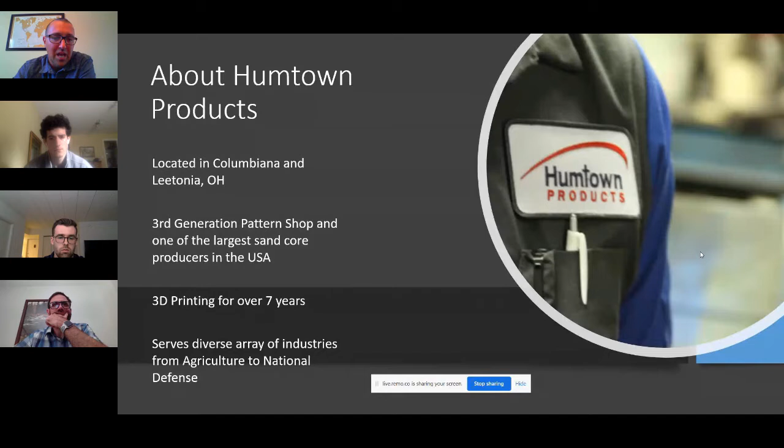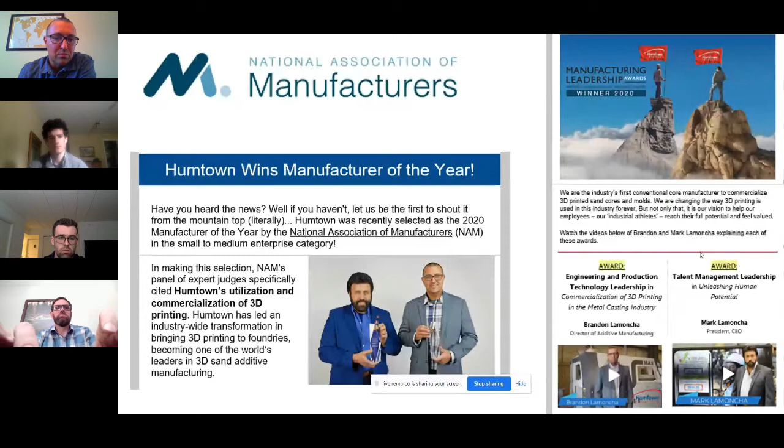So it really goes to show that additive manufacturing is being adopted not only here in the United States, but worldwide. We're shipping product not only to Canada, Mexico, Brazil, but we've air freighted as far as Indonesia. So we're starting to see this as a global trend.

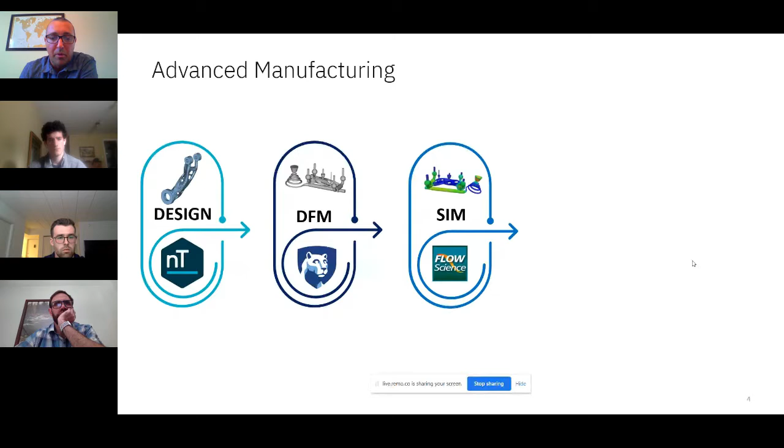But like I said, 3D sand printing isn't really even the focus of this talk today. Today we're talking about advanced manufacturing as a whole and the partners we partnered up with to design a really exotic part that would not typically be thought of using sand casting, and the tools to ensure first-time success. So we'll talk with nTopology with Ryan O'Hara on the design, and then design for manufacturing with Penn State. We're going to touch lightly on the simulation, we used a partner at Flow Science for simulation. We'll talk a little bit about the mold being printed at Humtown, and lastly, it was poured at our partner, Trumbull Foundry and Alloy, locally.

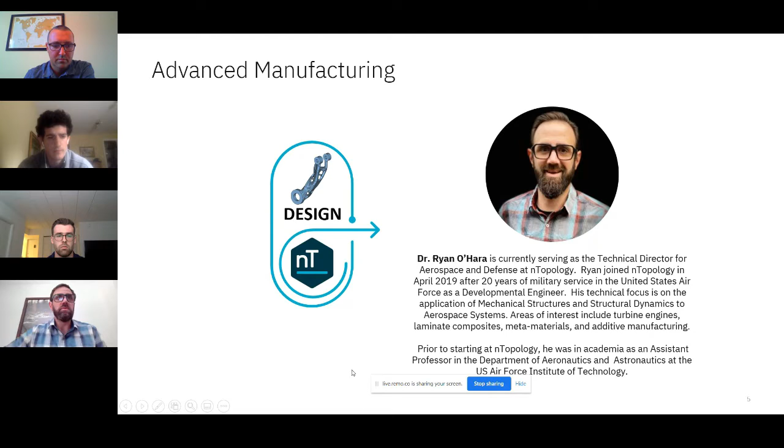So, go to the next slide. Okay, and then actually if we could get the text up there. So what is nTopology? We're really just a computational modeling platform for design, simulation, and when you couple those together you're able to do advanced manufacturing. And the way we handle geometry is we actually use implicit geometry, and that implicit geometry allows us to generate shapes volumetrically, and we're able to do that really quickly.

With that said, we also take a field-driven approach, and we use fields every day when we do design. Oftentimes it's a flow field, or maybe a stress field, or displacement field, and typically the designer will use those fields to influence their design, either to add or remove material. And we can actually do this programmatically in our software. And then finally, once you're able to generate a design, we actually allow you to store and keep that workflow so that you can reuse it down the line.

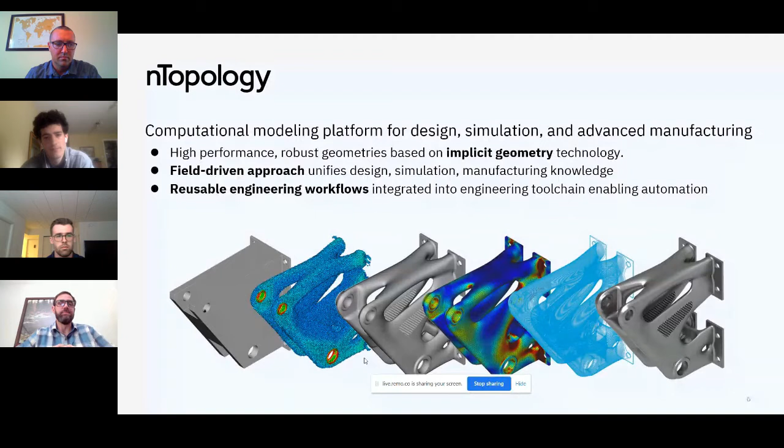So, we'll go to the next one. Okay. So with that said, I was reaching out to partners to work on a collaborative project, and one of those things that we've done here is -- you'll have to forgive me, my children may have forgotten that we're doing a webinar here, so we may hear some noise in the background.

With that said, one of the big things is that in manufacturing, you might have common platforms like a robotic arm, especially when we talk about efficiencies in the workplace, and making things repeatable in that sense as well, and bringing automation in. So one of those things that we wanted to do, for an example, is use a robot arm in this case, where this part is produced via casting.

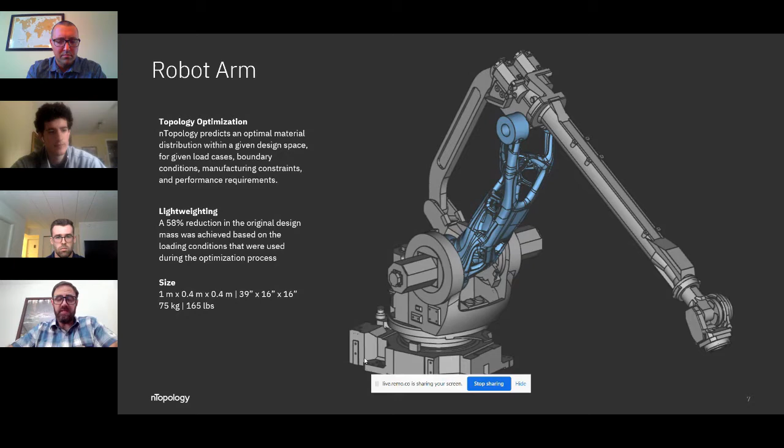And we thought, hey, using our software via nTopology, could we actually use a topology optimization method to actually lightweight that part even further? And for us at nTopology, this was a big deal because this robot arm was over 1 meter in length and about 400 millimeters in diameter.

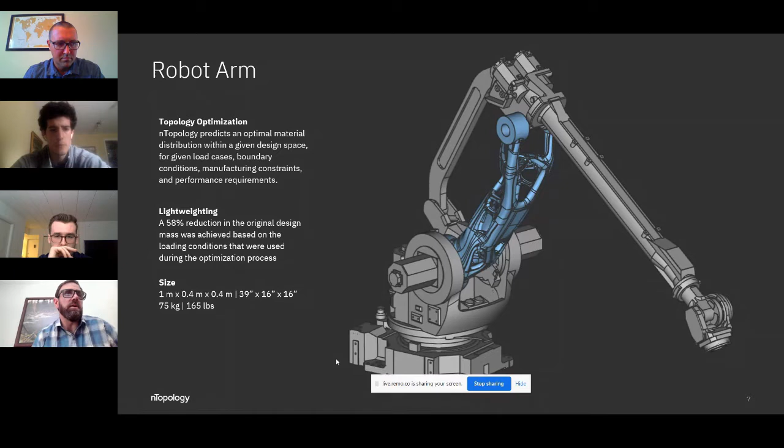Although additive manufacturing is great, it's not really the best way to produce large geometry, and we need to go to more traditional processes like sand casting. And that's kind of where Humtown and Penn State came in. So the motivation here is to produce this optimized part with a 58% mass reduction.

In terms of advanced manufacturing, going back to this multi-step process of producing an optimal part: casting, so design and simulation is one piece of this, and then the casting and the final machining are the other parts to this.

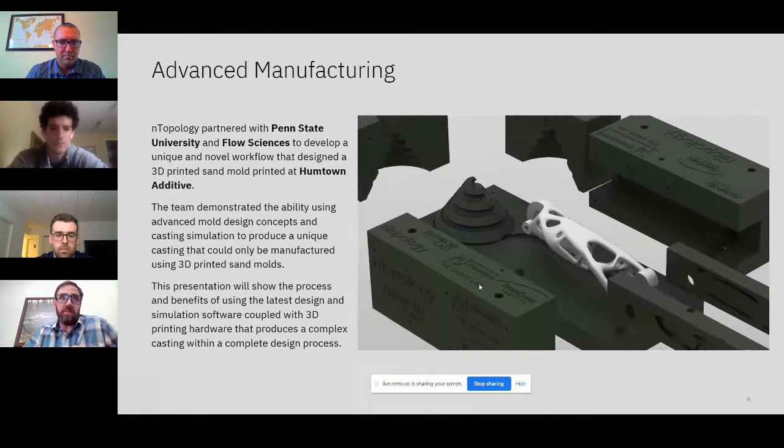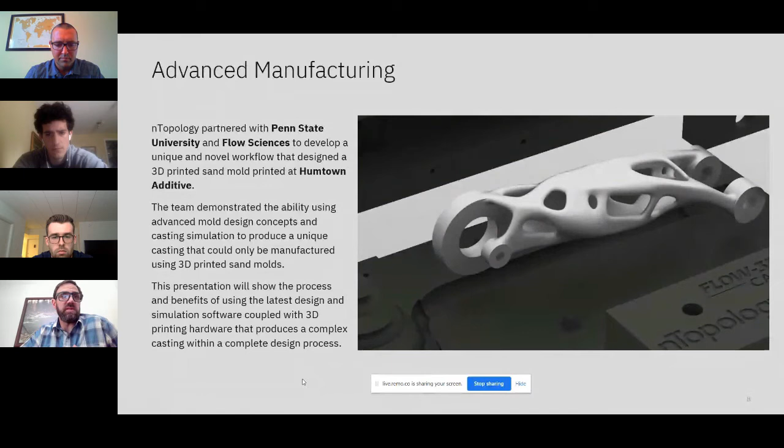We needed to partner with Humtown and Penn State, and we also included Flow Science to do some casting predictions to help produce an optimal part, especially when you consider the size of this part. When we initially planned this, the size added a fair bit of cost in terms of the mold, so we needed to make sure we got this right the first time. That's where we brought in Penn State and Flow to help out with the core and mold design.

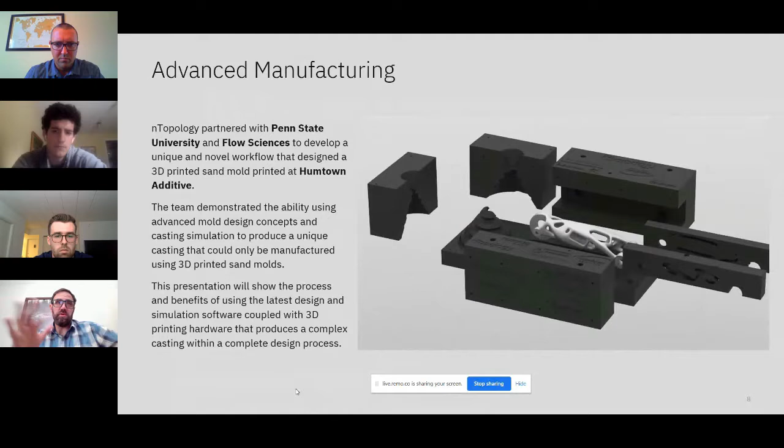As you can see in the image, this is kind of the multi-piece part that is able to produce a lot of complexity here. We'll be talking about some of the other features in terms of advancements in casting and mold design.

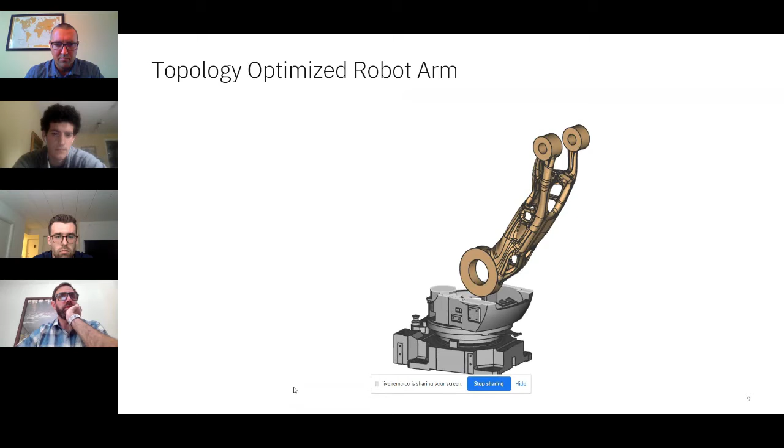In terms of topology optimization, what does that really mean? The key here is that we use a common method called the solid isotropic material with penalization method. No one ever really says that - they just say it's top-op, or I use top-op with SIMP.

The idea is that this SIMP method gives you a material distribution based on density, and then we use that density to basically put material where it needs to go. We often call this a load path visualization. Engineers will apply loads and look at the stress, looking at colors in areas of high stress and areas of low stress, removing material in areas of low stress.

We're basically doing that in this scenario, optimizing this part for stiffness while minimizing weight. So that's the key here - we have a really stiff part with minimal mass.

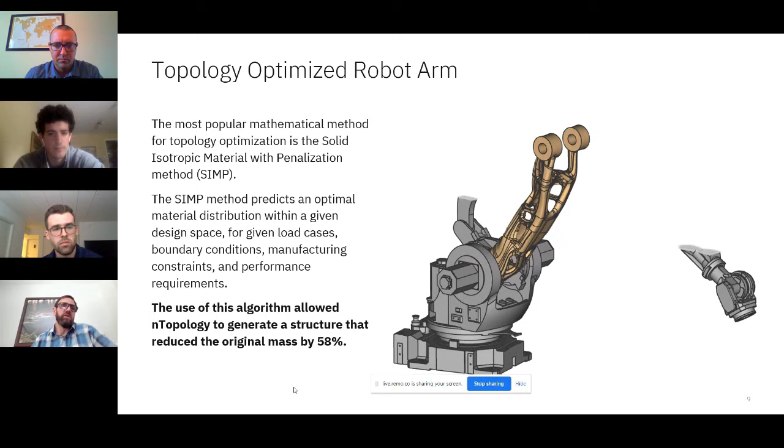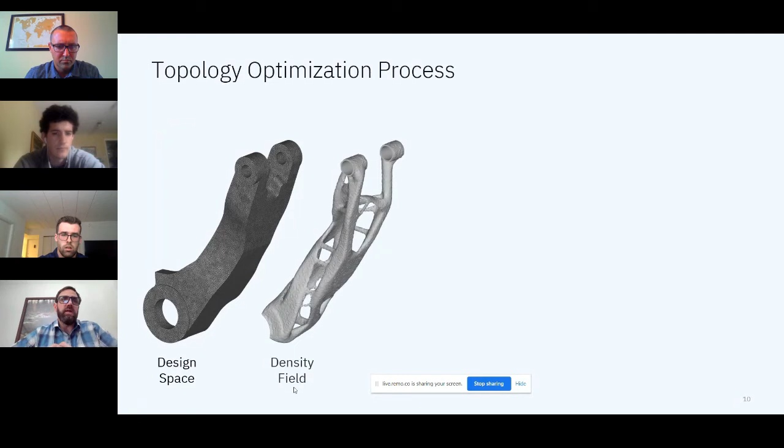In terms of what that looks like, ideally you would have a large design space, and that design space is going to produce this density field. We think of load path visualization, where we use that density field, and you'll notice it has jagged or rough edges - that's part of the process where we use the simulation tool, or FEA, to volumetrically discretize that shape, and then we remove elements as needed based on the density field.

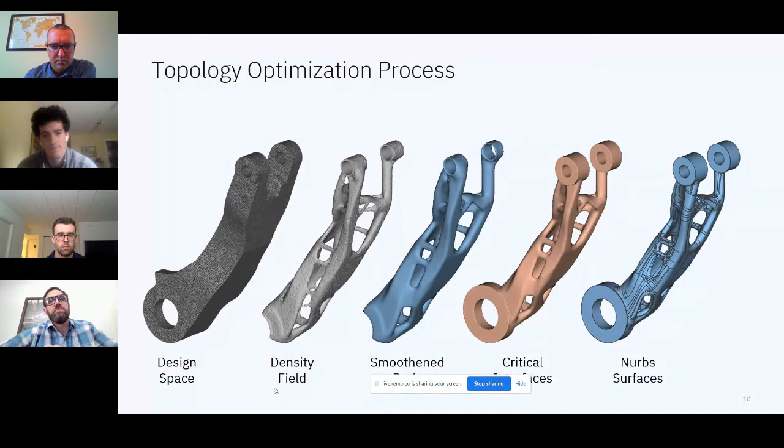We have some tools using our implicit modeling technology to smooth that, and then we're able to add in those critical interfaces. Ultimately, we can bring that back into a CAD environment with these NURBS patches. So that's kind of how you're getting your biologically inspired shape, just optimizing for material stiffness, and you can see the different parts in the process.

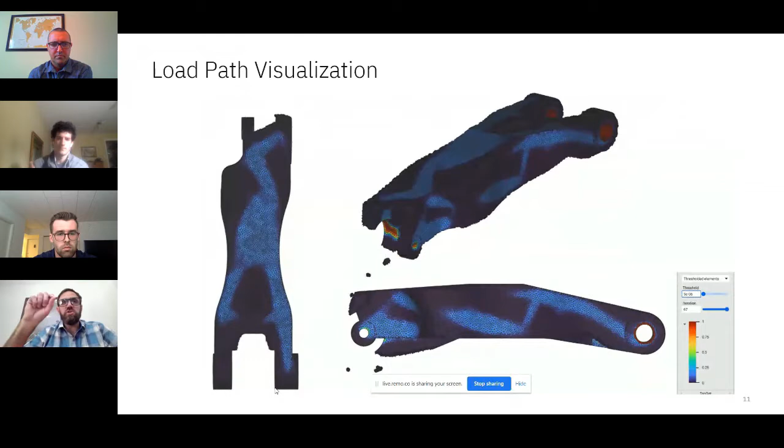In terms of load path visualization, when we talk about that density field, all I'm doing in this video is changing the density threshold - that's the little box in the lower right. As we change that threshold, we're seeing where the material is needed or not needed. In our tool, we allow the designer to pick a target threshold, but we give them the option to pick, maybe I need a little bit more, or maybe I want a little bit less than the original goal, and we're able to visualize that.

Often designers will just use nTopology to do this load path visualization, and then maybe even use their own CAD tool to identify areas where they don't need material.

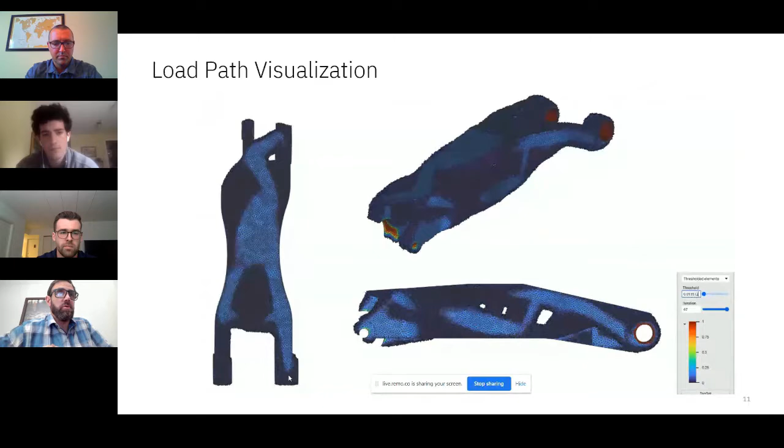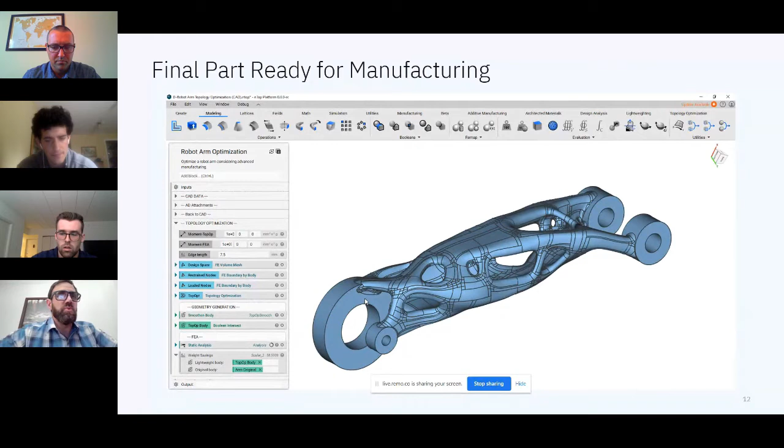At the end of the day, we basically just get a final part that's ready for machining or manufacturing. But as we all know, on the design side, there's the final design, and then there's the design for manufacturing. At this point, I had to reach out to Brandon, who then reached out to his contacts at Penn State and also at Flow 3D to bring in partners to help us with the final design that was going to be used for the casting piece. So we had the final design of the part so it would work on the machine, but now we needed to take that next step.

I do want to highlight that nTopology was just responsible for the design, and then Philip and Ryan over at Penn State took over this design for manufacturing. Then we worked very closely with our flow science friends over at Flow 3D, who are not on this call, but that was a big piece of this, and I believe Philip's going to talk to that. So, thanks again, look forward to talking with you folks.

Brief background about me: I did my undergrad at Penn State in mechanical engineering. I'm currently in my second year of my master's program in mechanical engineering, again at Penn State, with intentions of receiving a minor in additive manufacturing. I'm part of Dr. Manogharan's SHAPE Lab at Penn State, and my research is primarily focused on redesigning runner extensions to reduce casting defects, utilizing 3D sand printed molds for more novel designs.

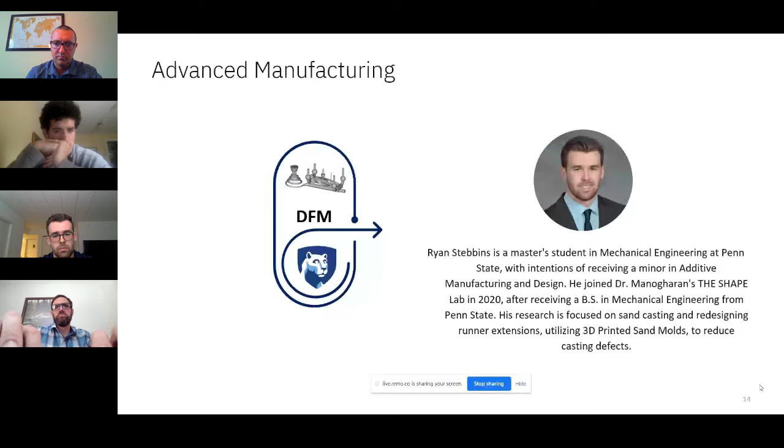I'm sure many of you are already aware of sand casting, but I'll briefly go over it. You've got your sprue, runner extension, and riser. All of these are vital for ensuring a quality casting and reducing defects. If you have a great design like nTopology came up with, you need to have the proper gating and risering to make sure you get a quality end result, so you're not getting high scrap rates and low yields. But some of the limitations with traditional sand casting are you're not able to get some more unique designs or geometries for these rigging components.

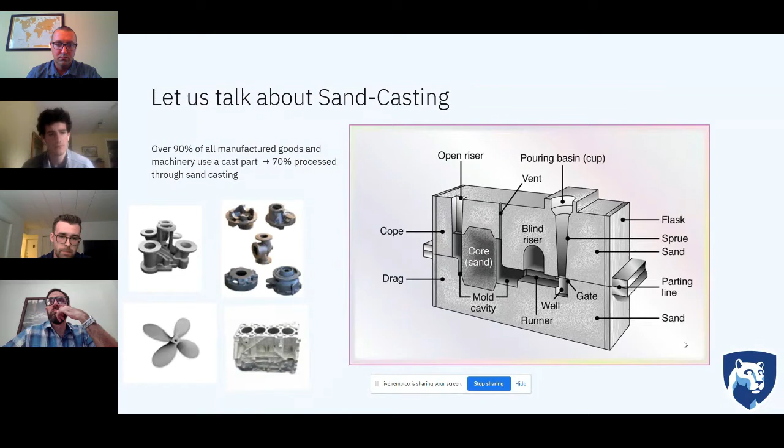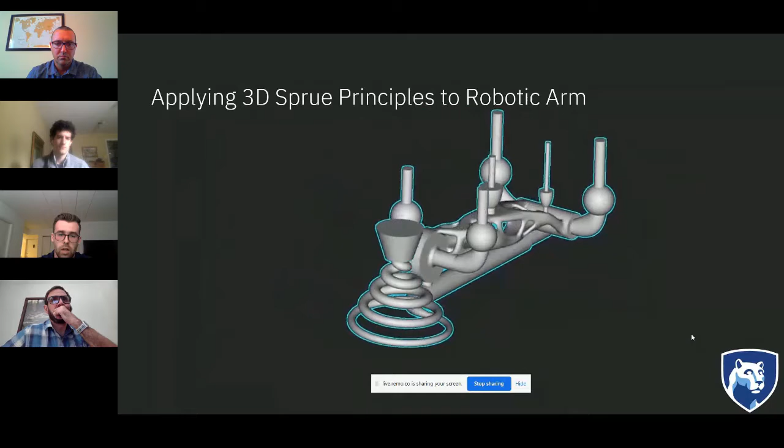This is just a quick image of the rigging design that was come up with for this robotic arm, which Phil will go into greater depth on. I'll touch on the sprue a little bit and just 3D sand printing in general.

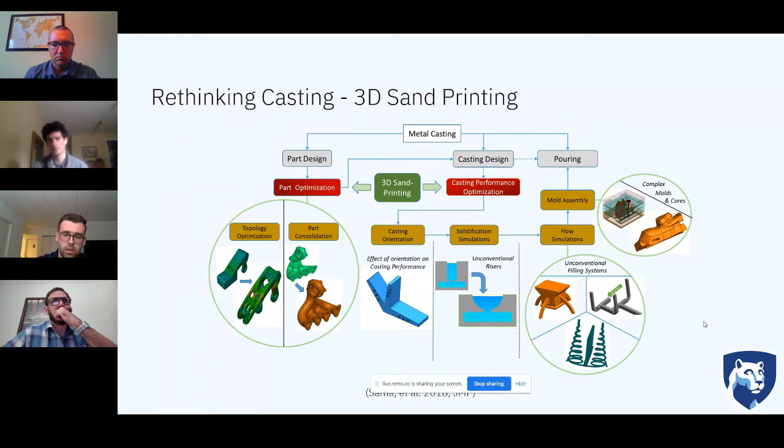The main benefit for 3D sand printing, like I've touched on already, is the ability to create some novel geometries for rigging and overcome some issues or challenges with traditional rigging, like high turbulence or in-gate velocity that may cause porosity defects or oxide formation, the placement of risers and even the geometry of risers in order to prevent solidification defects like voids or pinholes. So that's the main benefit of 3D sand printing from a rigging perspective—you're able to tailor your rigging geometries for the design more easily and with optimization.

A quick example of where you might see this is with sprue designs. Sprues are pretty important when dealing with filling related defects—they're major in reducing or causing turbulence in the melt and increasing velocity, which could cause filling related defects and porosity and oxide formation. So this is one area that you can, and we did for the robotic arm, focus on redesigning and utilizing 3D sand printing.

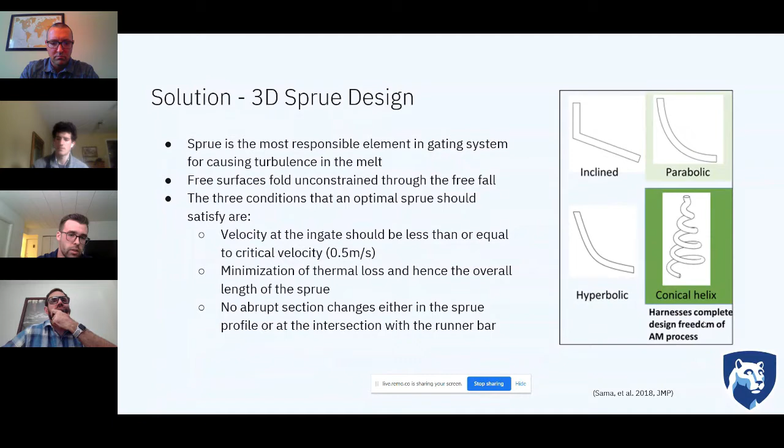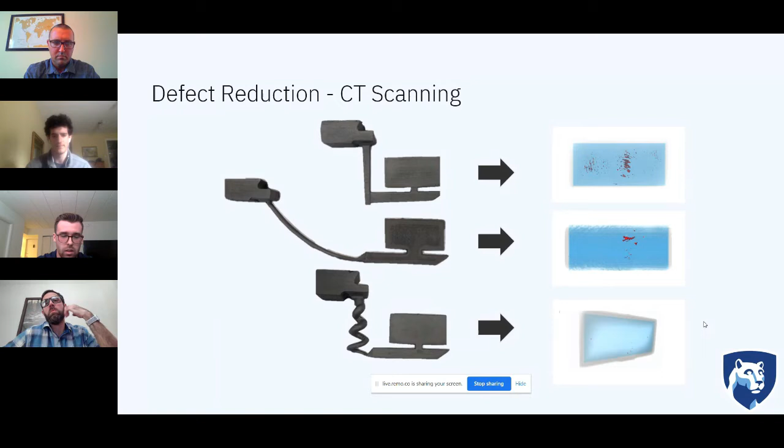This is some results from previous research done by a former grad student in the Shape Lab. You can see a traditional straight sprue, a parabolic sprue, and then a conical helix sprue. The goal was to prove how 3D sand printing and redesigning the sprue can positively impact casting quality. You can see from the CT scans the reduction in porosity or entrained air with the conical helix versus the other two. This conical helix is pretty complicated and not really possible or feasible using traditional methods. So this could be scaled up or modified for all sorts of geometries and sizes of castings, as Phil will go into a little bit more.

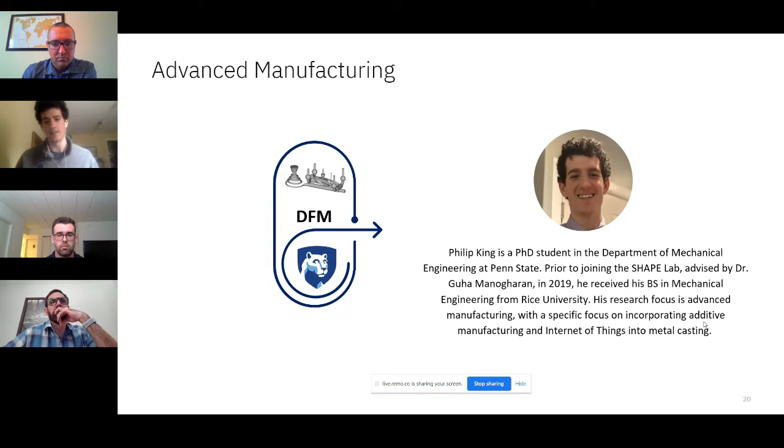Hello, I'm Philip King, a PhD student in the Shape Lab under Dr. Manogharan. My research focus is primarily in novel rigging geometry—conical helix and parabolic sprues that are only able to be manufactured via 3D sand printing. Another aspect of my research is embedding sensors into sand molds using 3D sand printing, so we can print a mold with a cavity, place a sensor in there, and get data during filling and solidification that otherwise would be unavailable to us.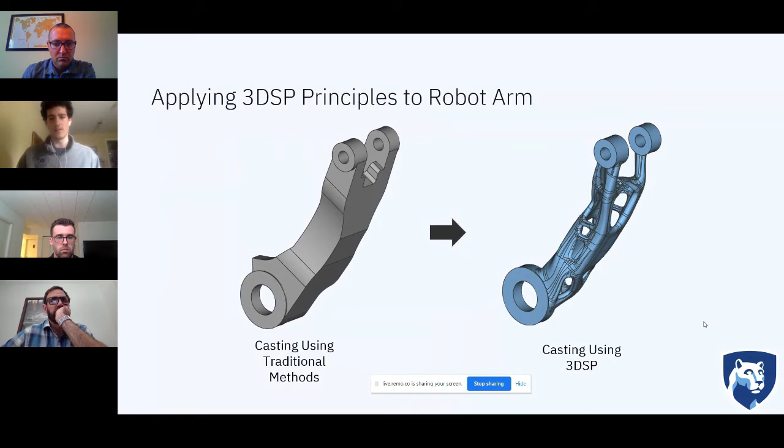As Ryan alluded to, he gave an overview of the different things we can use 3D sand printing for to optimize our system. We were already going to need to print the robotic arm casting, so why not print a novel rigging geometry for it so we could get the highest quality casting possible, rather than just a standard straight sprue, straight runner, and cylindrical risers. With that in mind, we took this casting and started designing a conical helix sprue as well as novel spherical risers to get the highest quality casting possible.

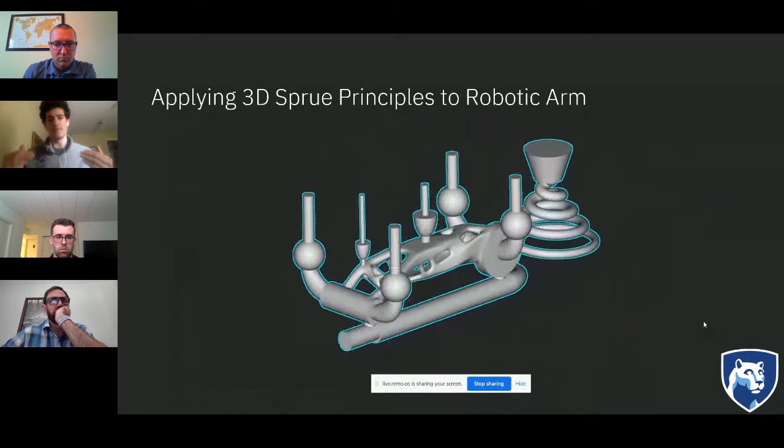Here's the picture of the final product we came up with, which has a conical helix sprue on one side and a long runner. Our goal was to fill the casting evenly. When working with Flow 3D simulations and iterating through that, we'd see uneven filling depending on where the sprue was. Eventually we figured out the best way to evenly fill it is to have a slightly tapered runner and two gates on either end of the casting so it would fill slowly.

Now I'll talk more about the simulation. Our workflow with Flow 3D started with a solidification model to figure out where the hot spots were and where we'd need to place risers. Next, we tried a design minimizing the area needed for the mold—putting a conical helix sprue right next to the casting with just one riser on top to see what would happen. When we did this, we still had areas where we didn't fully fill the casting, and we got hot spots during solidification.

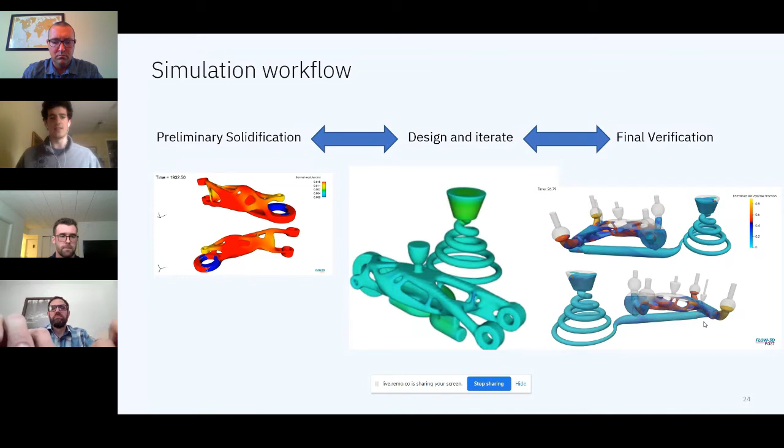Once we saw this, we started using spherical risers that we could only really place using 3D sand printing, and also moved our sprue location so we'd get even filling throughout the whole casting. Finally, in the design on the right, we placed numerous risers in our problem areas, and had the sprue on one end with that long runner to facilitate even filling throughout the entire filling process.

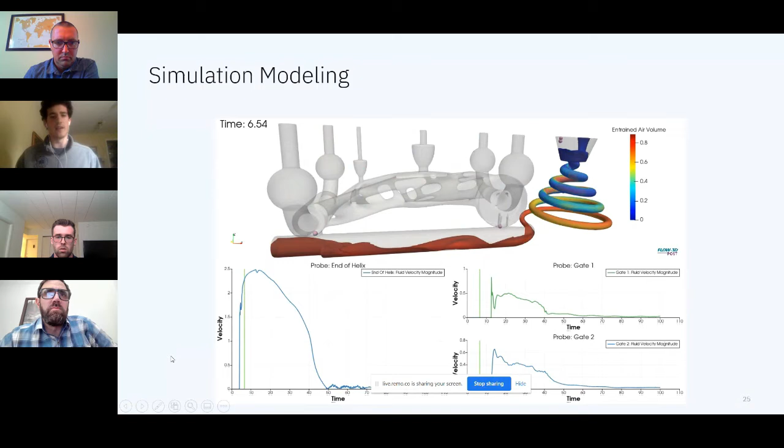Here's the final model of filling with Flow 3D—you see very slow filling so we don't get splashing during filling. This is due to the conical helix sprue slowing down the melt, and the long runner taking a while to fill up so we don't get turbulent filling, which reduces defects in this casting. This is especially important for the topology optimized casting, where we don't have a high margin for error with these small surfaces.

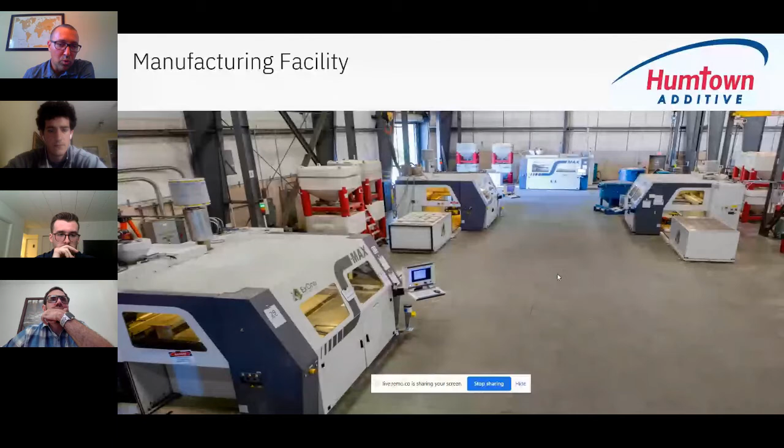We may not see every mold and core 3D printed in production, but there are definitely a lot of applications in smaller consolidated cores where we are seeing this. If this design were to go to production, there are hybrid methodologies where a pattern could be constructed and the internal core, which is very complex, could be printed even into production.

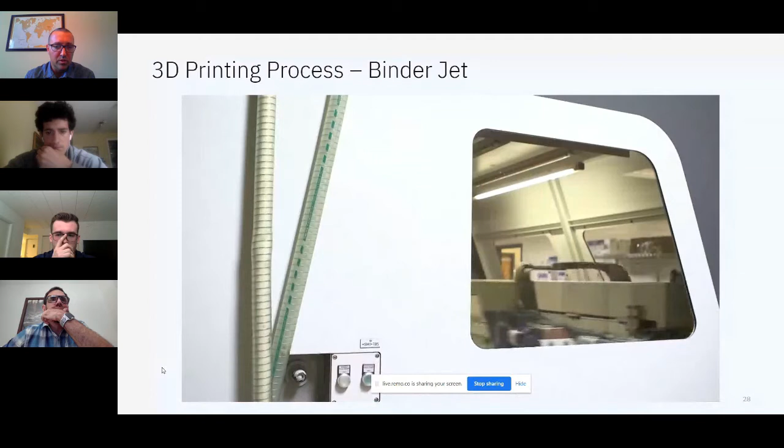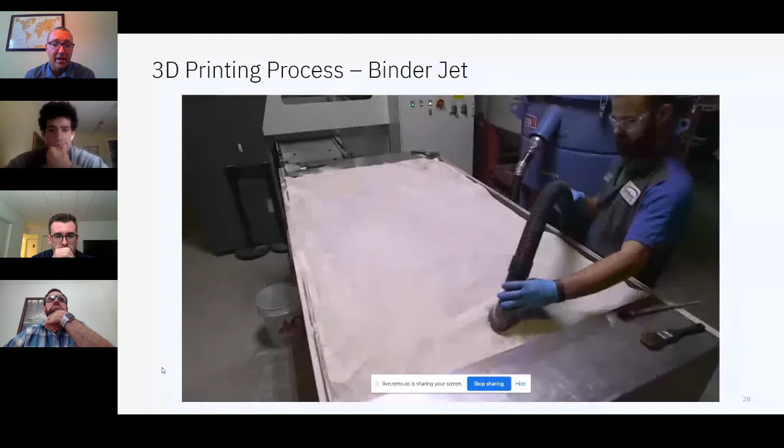For those of you not familiar with the 3D binder jetting process for sand molds, the sand is the aggregate we use for making the mold. It's vacuumed up into a hopper where it's mixed with one part of the additive, and then the print head deposits the binder. It's a 2-part system. The cure takes place, we can print, and then we basically harvest the parts out.

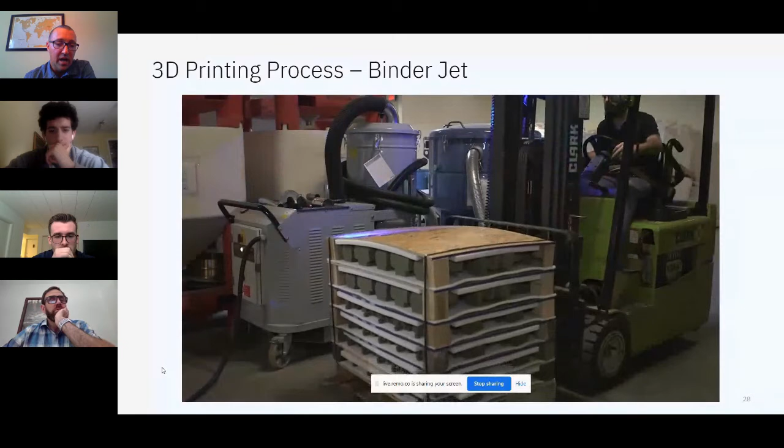Anything that is white sand would just be reclaimed sand that could be used again in the printing process. The green part is the fully reactive core. We clean those cores after they're harvested, package them up, and ship them out to customers throughout the United States, Canada, Mexico, etc. So that's the 3D printing process.

As I mentioned, we're not going to focus a lot of time on that today, just as we're not going to spend a lot of time on the casting. The real effort, the meat and potatoes of this project, was done in the very early design stage—designing for additive manufacturing, and then the simulation and iterations that went back and forth.

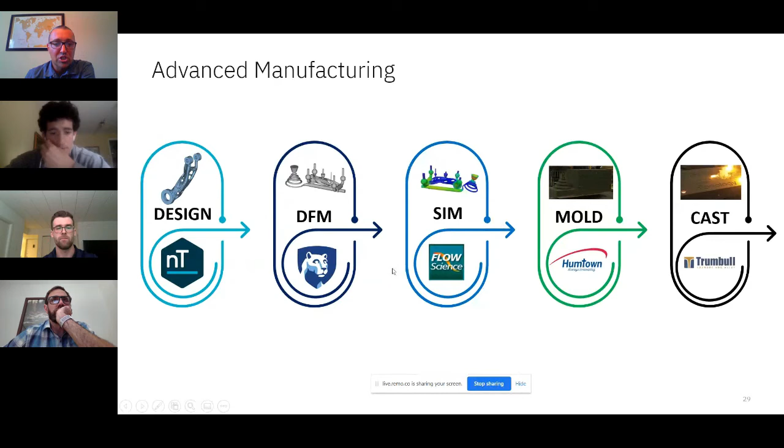This was the sand mold. We're gathering more pictures—I believe we have a video, maybe on nTopology's site and maybe on ours. We'll get all that, but this was the mold after it was printed.

The mold was harvested, packaged, and taken to Trumbull Foundry up in Niles, Ohio. They do automotive castings for aluminum, so they have an aluminum foundry. One thing to note was how large this package got with the gating.

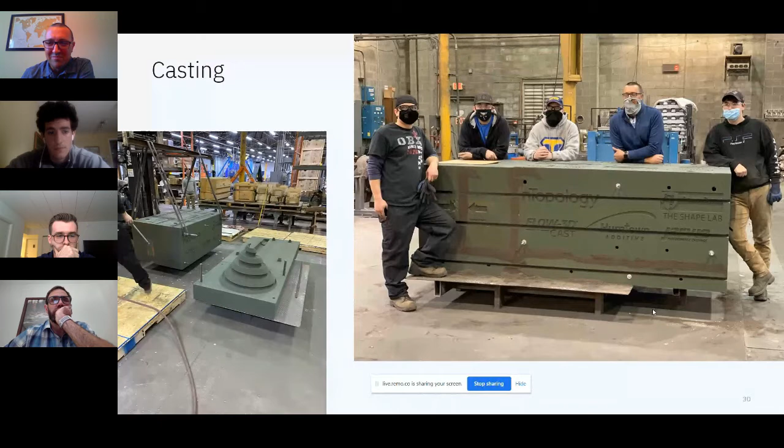In the novel design, our yield obviously wasn't very good, but we were able, luckily, to pour this all in one shot at the foundry because they had 1,000-pound melting capacity, and we used just about all of it. Even though you have all this technology, we got to the foundry and they said their ladle was only 800 pounds, so we did a direct pour right from the furnace. It was a great project, had a lot of fun.

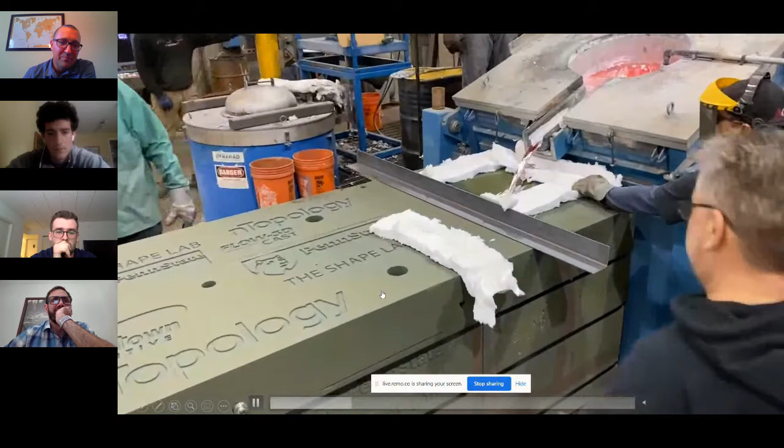As you can see, we bolted the mold together. We ended up putting some straps around it just to keep everything tight. Here we are doing a direct pour right out of the furnace into the mold, and there's more to come—we have the casting now. We're going to do some finishing on it, minor grinding, and we'll have some photos of that shortly.

That's a beautiful thing.

All right, so that was the project, talking about designing for the future of sandcasting. I think the big takeaway I had, when Ryan called me up from nTopology, the first thing I thought of was, well, that's usually used in direct metal printed parts—I don't usually think of that for 3D sand printing and sandcasting.

So I think the big takeaway from this project for me, and I'm sure many of the foundries on the line watching, is that there are software packages out there we can develop and use—better design tools to get to higher quality castings. So, with that, out of the presentation.